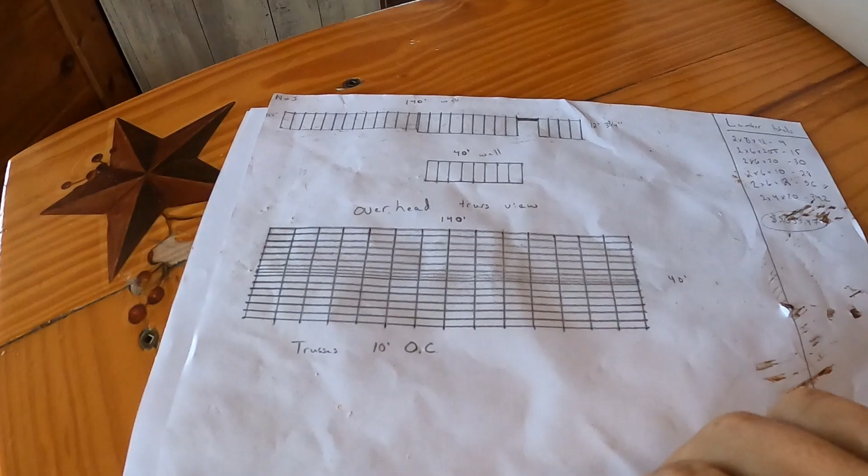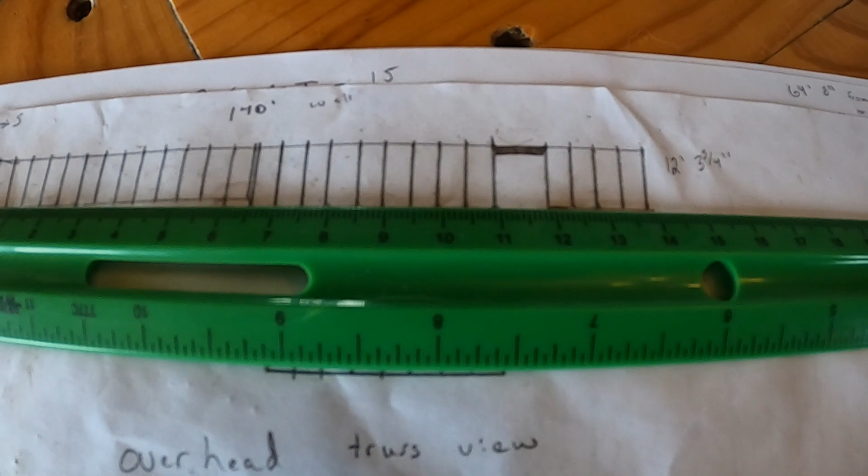And how I did it was, graph paper would be much easier, but I didn't have any graph paper. So I took this ruler, I used the centimeter side, and that centimeter side, basically every millimeter equals 1 foot. So it comes out right here all the way to 140 feet. Let me get something to point with. Okay.

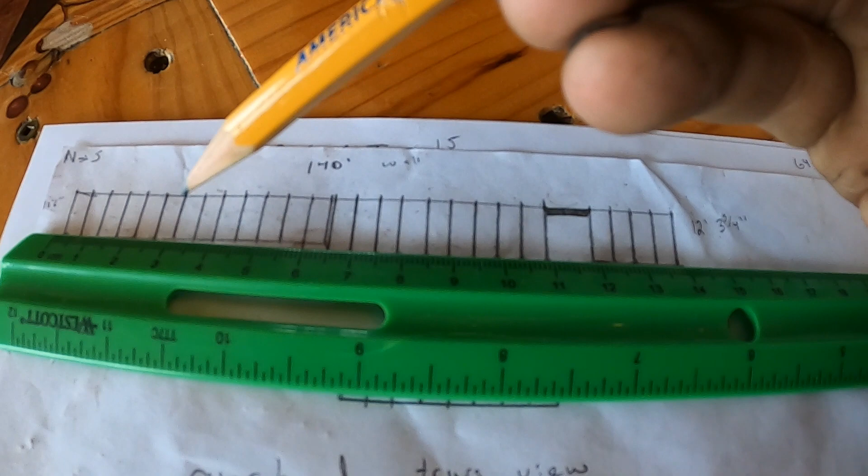So this right here is the opening for the door on the side of the barn. There's one on the exact same, on the opposite side in the exact same place. So everything is symmetrical. So what I do on one side of the barn, I'm going to do the exact same thing on the other side. So I only need to draw out one wall, and basically the east or west wall makes no difference, it's the exact same.

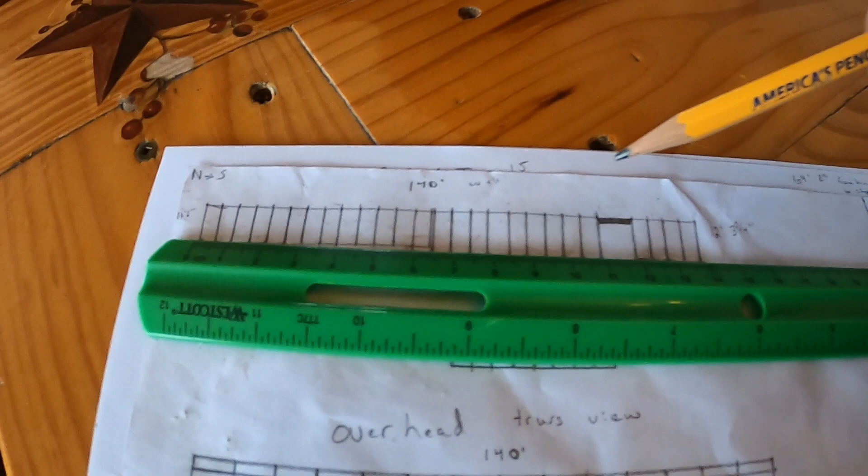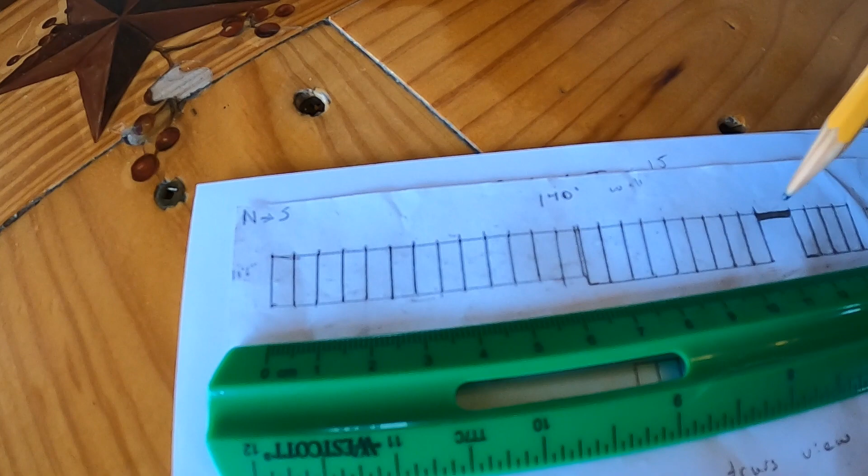You can see that I've spaced out, these are all made of, the walls are all going to be made of 2x6s, and they're going to be spaced out 5 foot on center. The bottom 2x6 right here will still be a 2x6, but it'll be treated. And there'll be 2x6x20s all the way down, obviously alternating the joints with the top. The top is also going to be 2x6x20s, but they're not going to be treated.

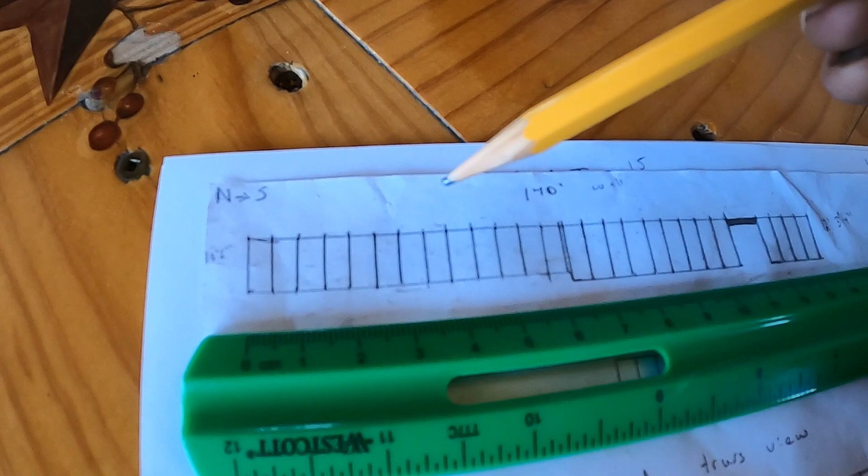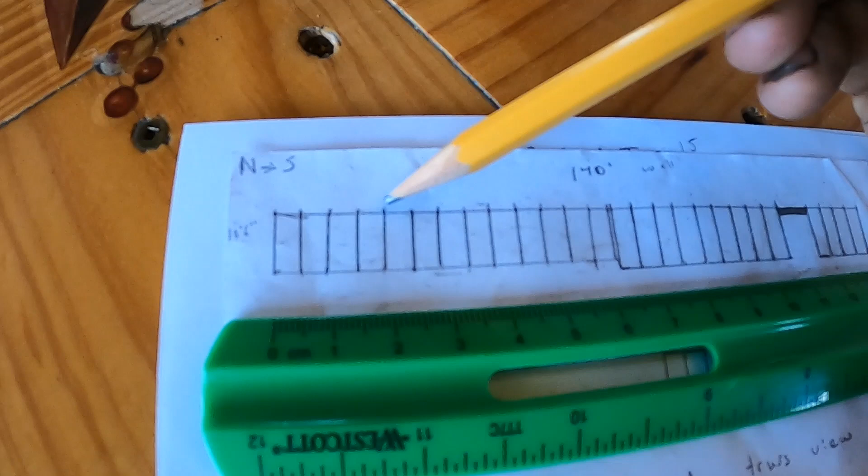What'll happen is I'll cut the top ones, and the first one I'll cut in half, so we'll do a 10 foot, and then from there on it'll be 20 foot 2x6s, and then I'll take the other 10 foot and put on this end. This offsets my seams at the bottom. So basically if I laid out a 20 foot 2x4 or 2x6, if it ends, so 5, 10, 15, 20, if it ended right here, if I had my other one end right here, I'd have two seams right next to each other. I don't want that. That takes away from structural integrity.

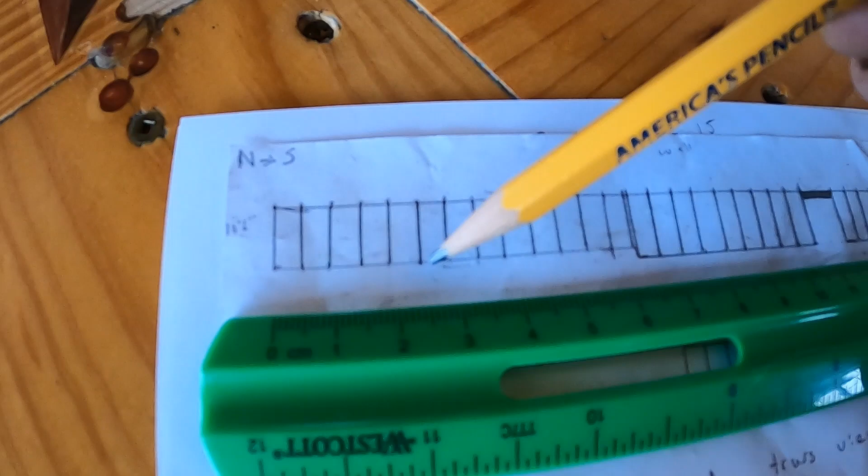Even though on the top it's going to have a double top plate. So basically it'll have a 2x6x20, and then I'll have another 2x6x20 on top of it. That 2x6x20 on top, no matter what, I don't want my seam from down here to match either one of the seams on the top plates. So I want them to be offset somehow.

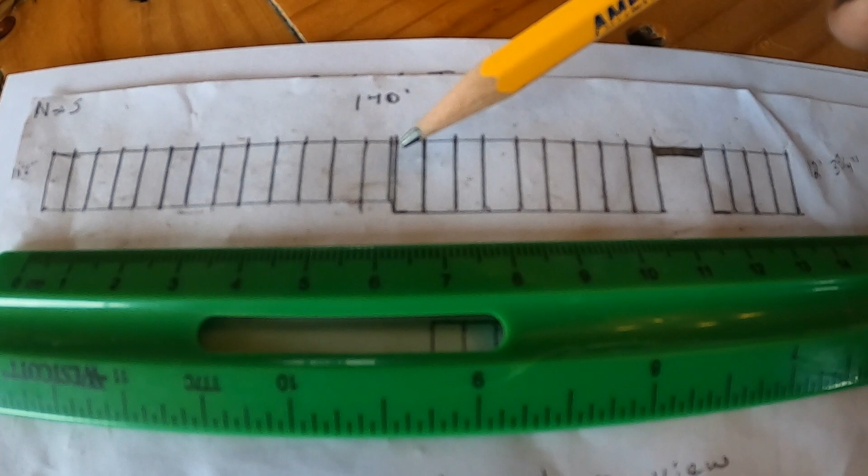Once we get down here, this is where the step in our wall is. So there'll be a 2x6x10 right here, and there'll be a 2x6x12 right here. They're going to end up being screwed together, and that'll connect these two walls. And then down here is the header. The header on the door is going to be made of 2x8s, and they'll be sandwiched together.

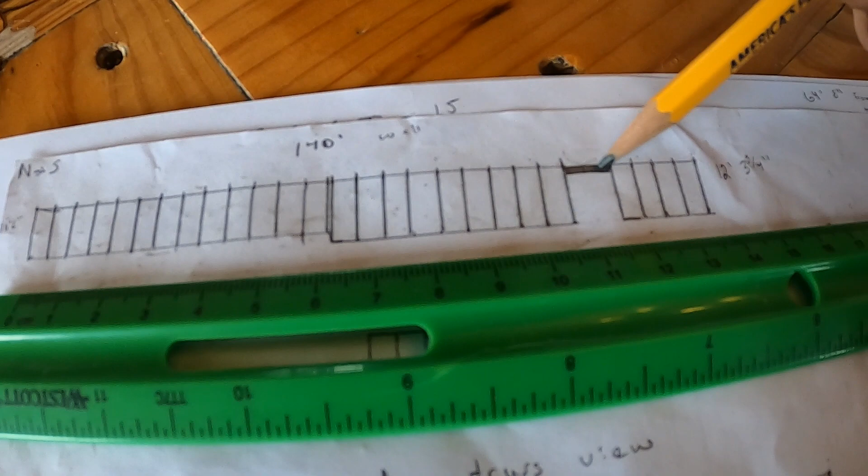So I'll have 3 of them basically. So 2 of them will be sandwiched together, and then I'll have another one behind it that's laminated on top of it, or behind it. You'll see on the build. On the corners, I will show you, it's going to be easier to show you than to explain on paper how they're connected. This is our 40-foot wall at the end.

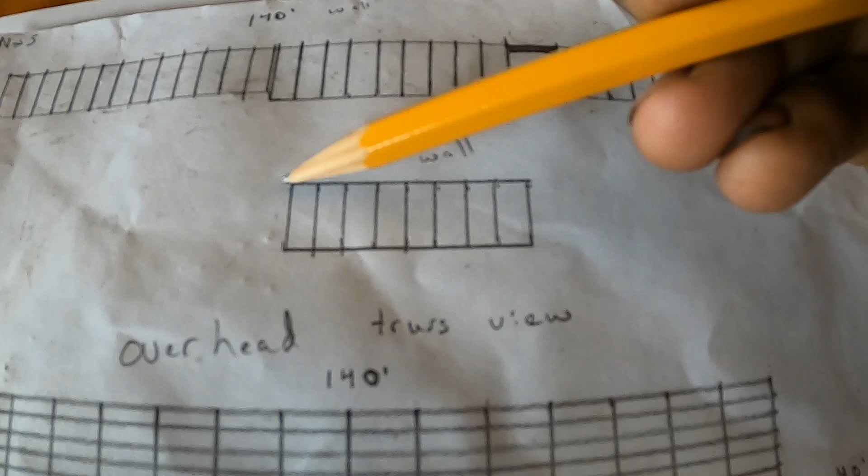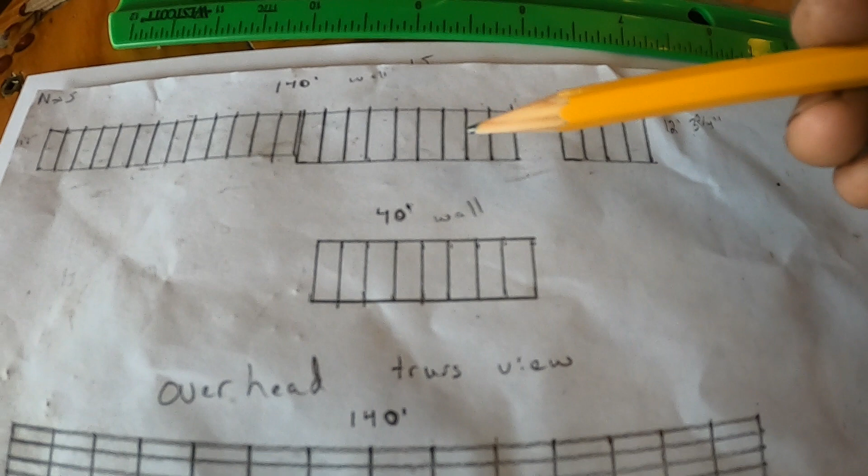Now it'll go straight across because the truss will actually come up like this, so that's where the peak will be. But this is the exact same 2x6. These will be 2x6x12s because they have to match this end of the wall so that they're all the same height. Remember, the step down on top of the concrete is all the same height. It's level, and we want it to be like that so we can keep the top of the barn level.

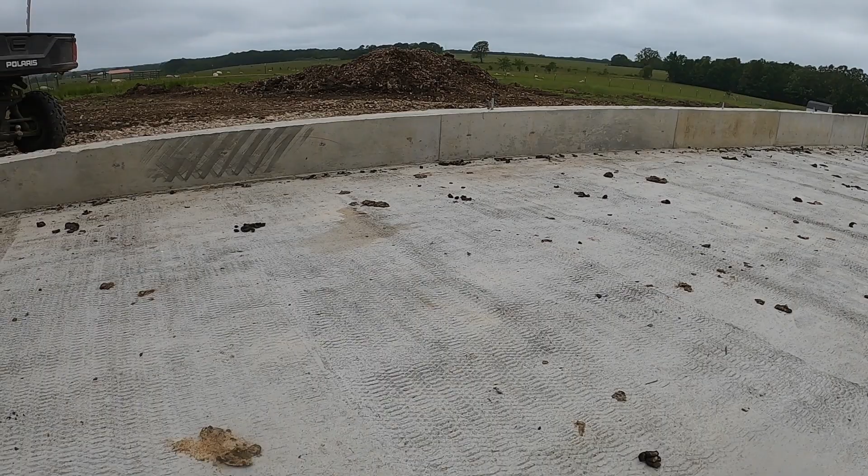These are the walls we're talking about. These are known as stem walls or curbs. If you look at it, right up here, it starts 6 inches and keeps the same height all the way down. Even though the wall itself is getting taller, it keeps the top of it level.

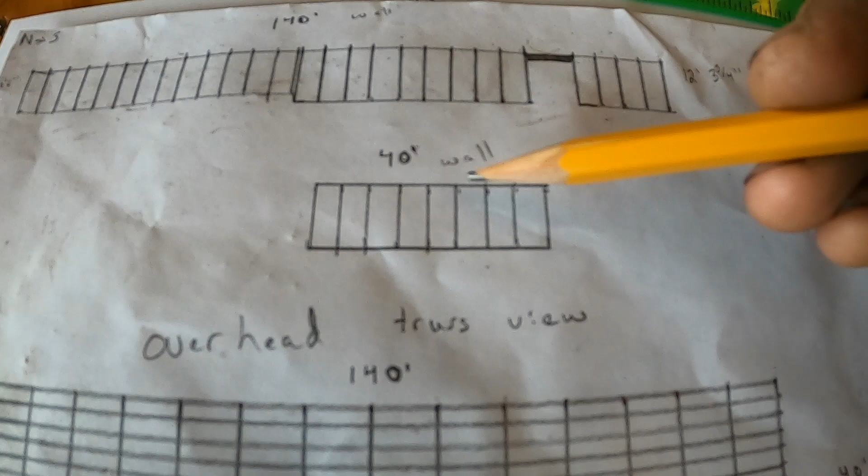This is 2x6x12s, and there'll be 5 foot on center. Same concept on the bottom, 2x6x20 treated, 2x6x20 not treated on top, and alternated seams so that they're not lined up on each other for structural integrity. And then I'll explain the corners, how they're going to tie to the other one.

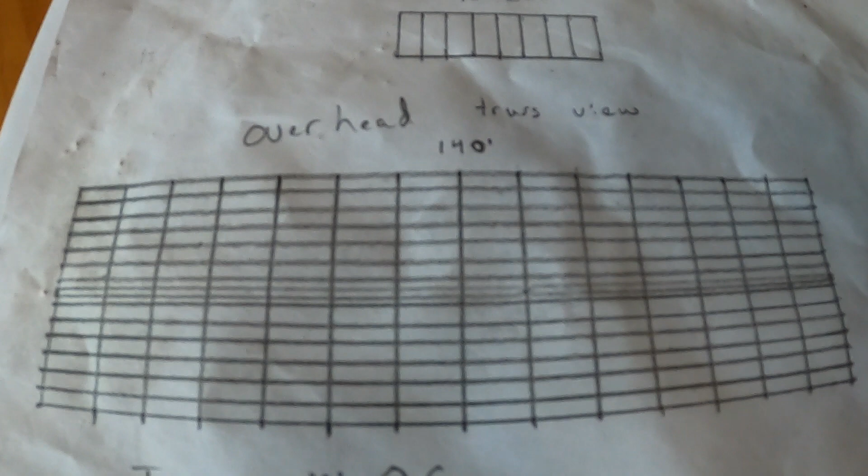Now, this, believe it or not, is not as silly as it looks. So I'll show you right here. Again, on all of my drawings right here, every millimeter equals 1 foot. Let me try to line this up. It's close. You kind of get the point, I guess, from it.

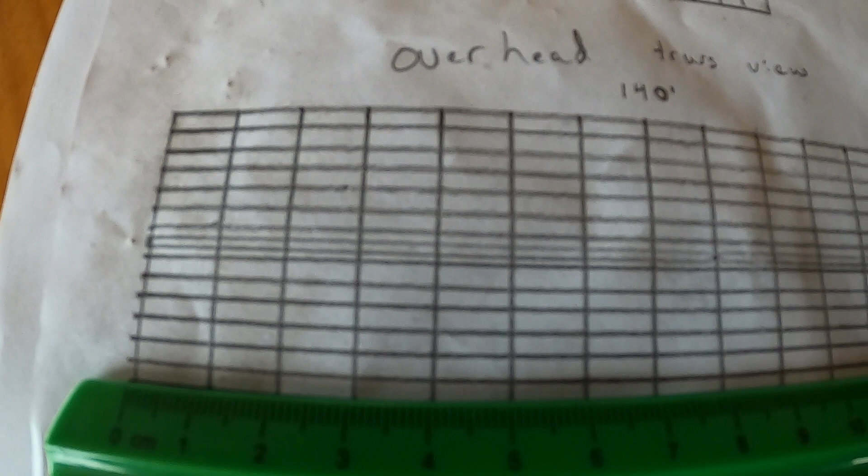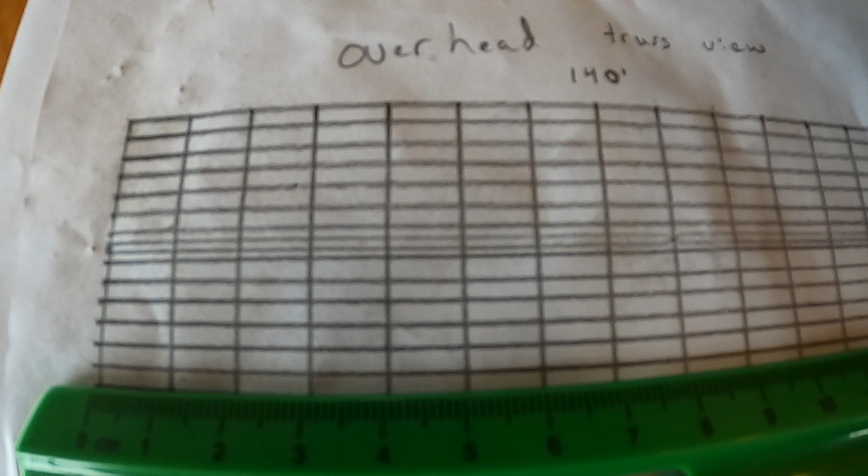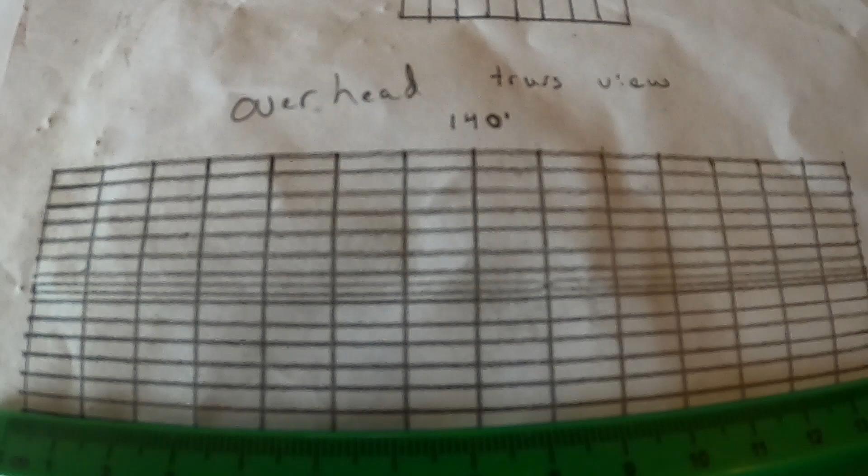So right here, the lines going vertical are actually the trusses. This is an overhead view, as if I was looking straight down at the barn from God's perspective, looking straight down at it. This is the trusses from overhead, and the lines running horizontal are all of my purlins. The purlins are for the metal to be attached to, the metal roofing, and then we also have plastic skylight panels, the clear plastic to let light in too. It'll make it better for the animals, and then we don't have to run lights all day in the winter time when they're in there.

Now these are 10 foot on center. All the trusses are. What's not quite visible as easily here is down the center. This is the exact center of the trusses, and there's a ridge cap that'll run down there. So I've got my 2x4x20s that I'm using for purlins, and they run this way.

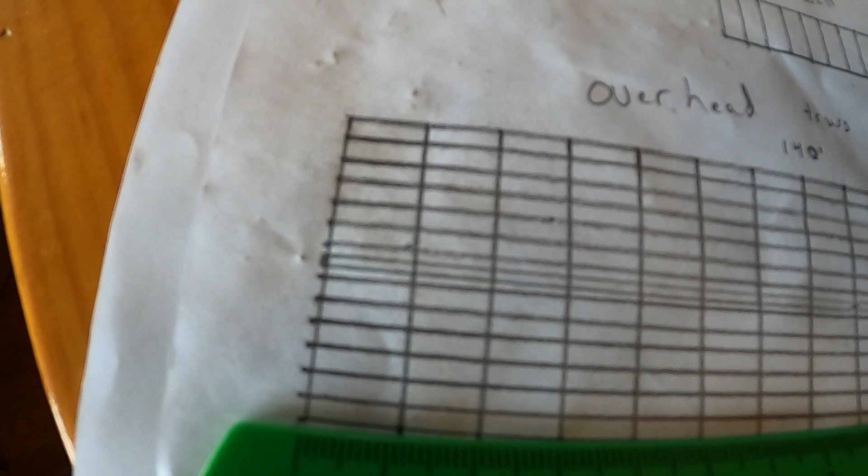Now, same thing, right? Basically I'll start out, so I'll have a seam here, and then I'll have a seam here, and then I'll have a seam here, right? Basically what I'm trying to say is, you'll see it on the build, we'll record it and show you, but basically I don't want any of my seams to line up, or I want as few of them as possible to line up.

Now, several of them are going to have to line up because there's not enough tie downs, not enough points where I'm going to be able to alternate them to where I'd never have a seam line up on one truss. There's going to be multiple on them, but there's also multiple going across, so there's still going to be lots of strength there.

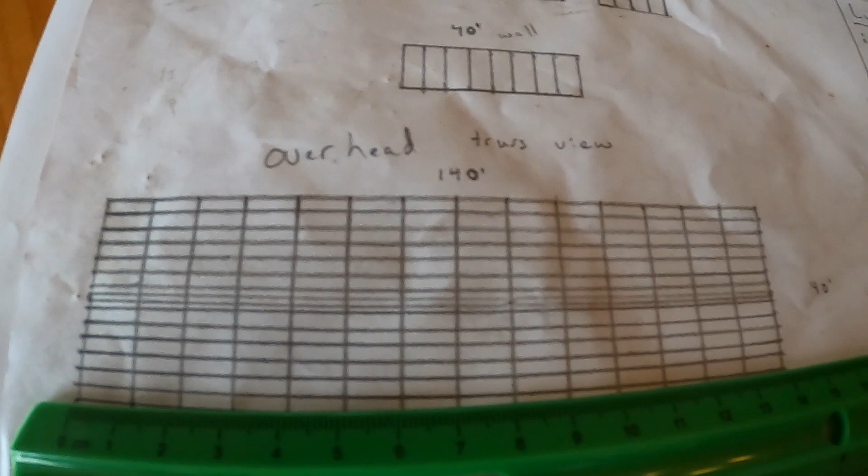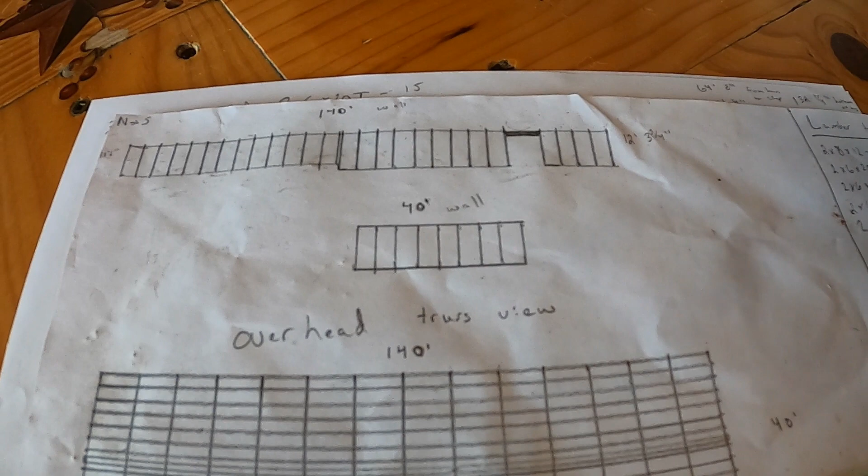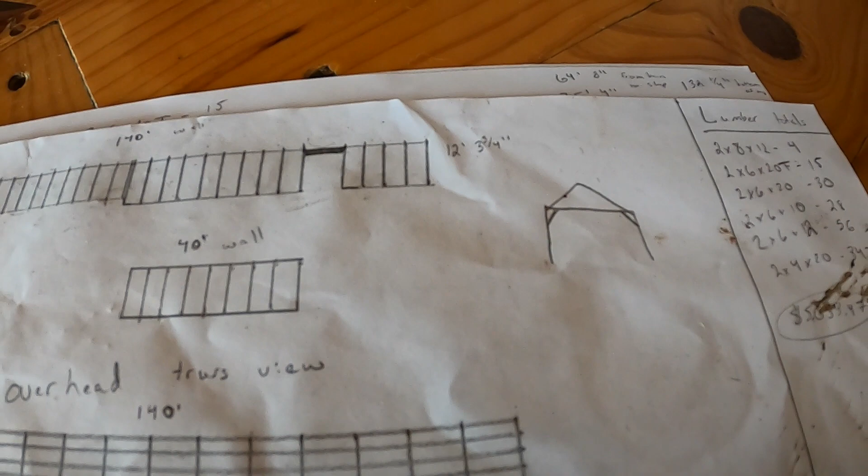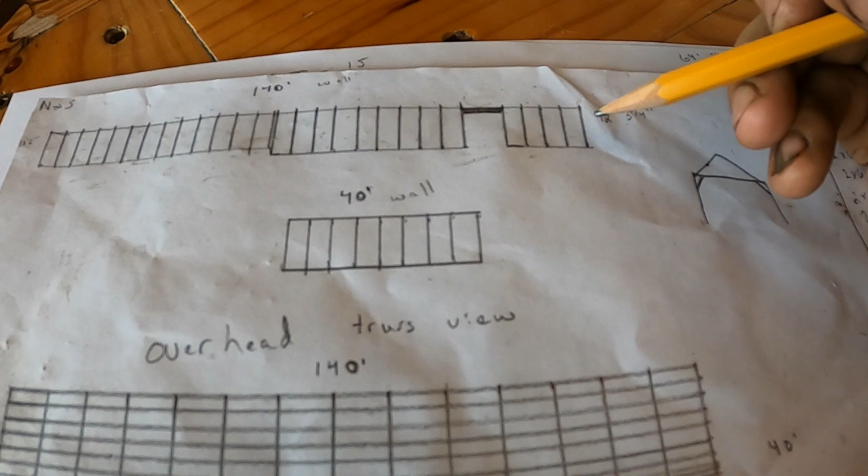The end of this barn, including the concrete, so you've got 4 foot below it for concrete, and then 7 foot above it to the peak of the roof. So overall you're going to have, that's 19 feet just in lumber, so it's 23 feet tall. It's going to be very tall, and it's going to catch a lot of wind, so we want to make sure it's as strong as possible.

And yeah, that's pretty much it for the plans. I'll show you the concrete real quick before we start building and explain the step process, and that'll be it for that part, and then you'll start seeing the videos of us putting it together.

She's mowing all by herself.

So I got Chrissy started. She's mowing - this is her first time mowing with the tractor. She had a zero turn before this. She really liked the zero turn, but the tractor is far more convenient, especially during the winter time, unrolling bales and stuff like that.

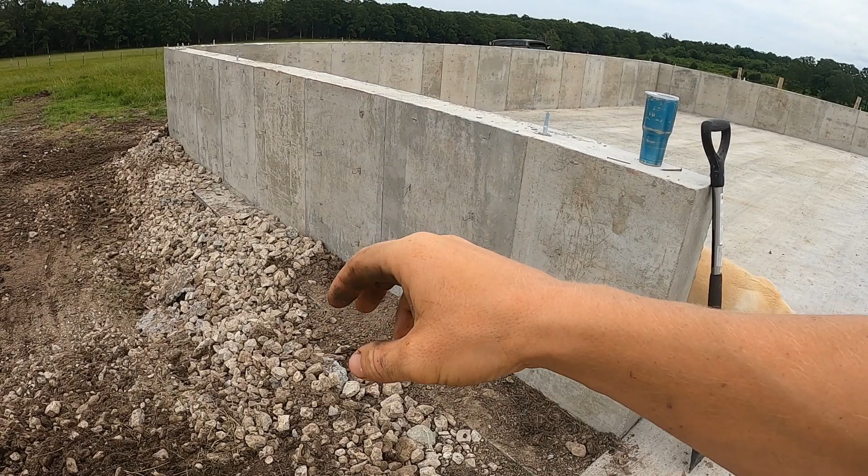But before I got her started, I used the scoop, or the bucket on the tractor, and scooped all this dirt up here. This part was real quick, basically scooped from that pile, dumped by the foundation, scooped it up there, covered it up. I want to cover the slab, so you can see where at the bottom of this wall, there's the slab that comes out. It's about 6-ish inches thick, a little thicker than that in some spots, but I want that to be covered from the exterior.

So we're using the gravel to do that. Gravel will go around from basically from this slab, or apron rather, all the way around to that apron, and then all the way up that side, because that side is all graveled anyhow, because we're gonna put our hay over there, so I don't want any mud over there.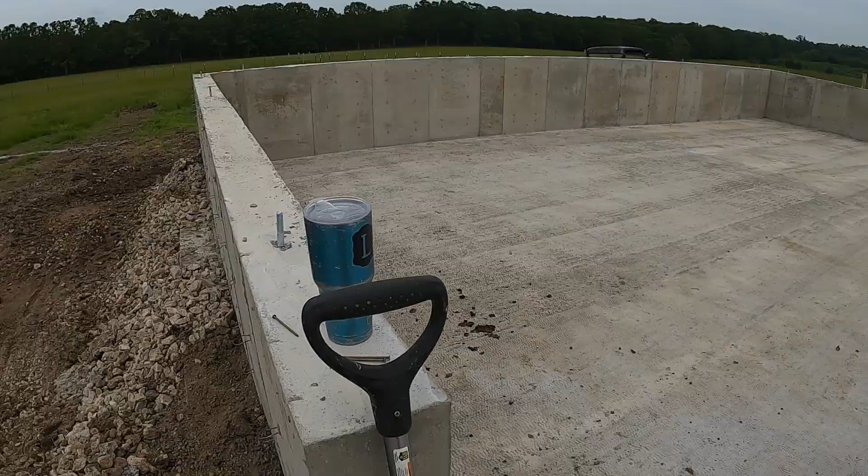This spot we put extra gravel in because I want to be able to drive off. So like that side's mud, but I want to be able to drive off in any direction. Cut it out - I want to be able to drive off it in any direction and be able, you know, be a smooth transition basically.

Did the same thing over here. Show you that real quick. So same thing, dump some extra gravel. I'm gonna smooth it down with the rake and the shovel.

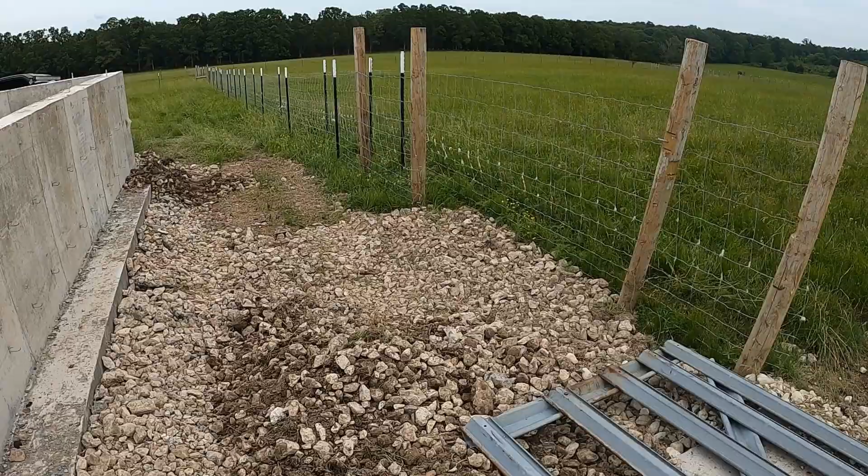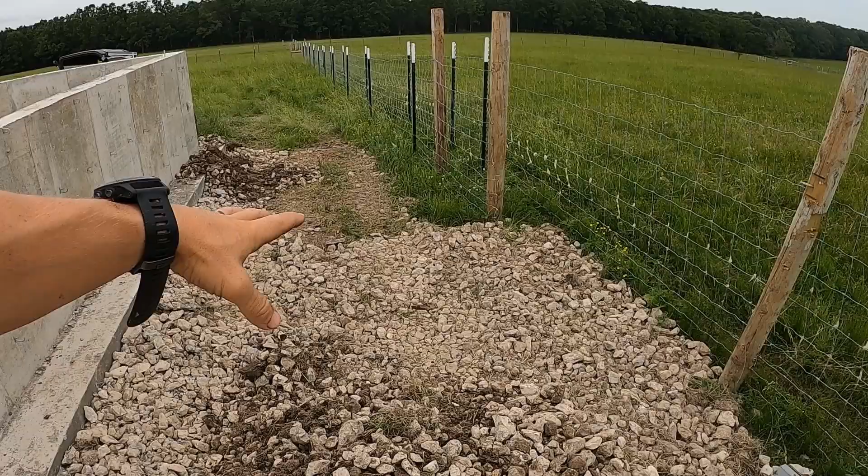And then this is all graveled right here because this is where we'll set our head chute. So I wanted it to be a good foundation for that, so it's not a big mud pit. Same thing right here where we're going to be walking when we're doing any work with the animals - we don't have to stand in the mud.

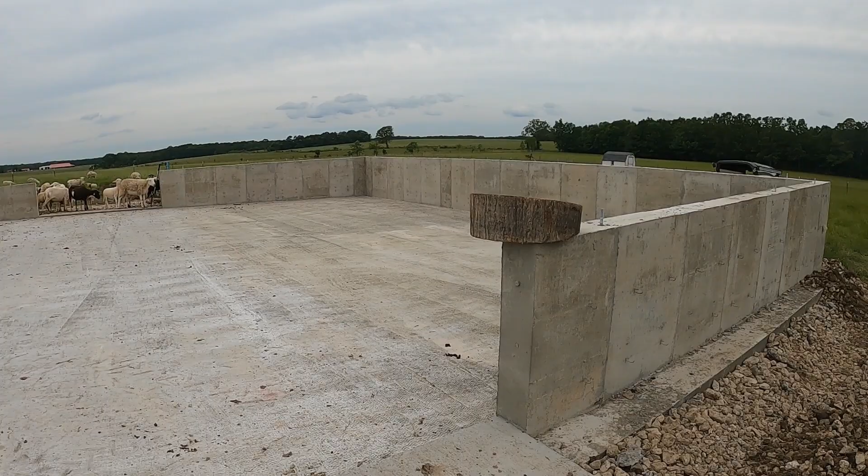And then basically this gate will actually be up, and whenever we're doing our work with the head chute, if we're keeping them, we'll push them out to this paddock. If we're going to take them to the sale barn, we'll push them straight in here to the barn. And then if for whatever reason there's somewhere else that they need to be separated to, we can push them back this way too. So we could do 3 groups basically - lambing paddock, back into the barnyard, or into the barn, because there'll be a gate on both sides where you can keep animals in or out.

All right, time lapse.

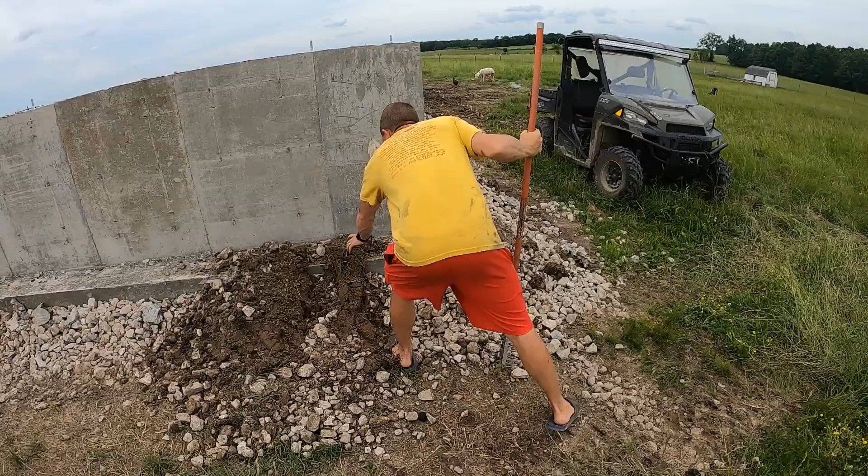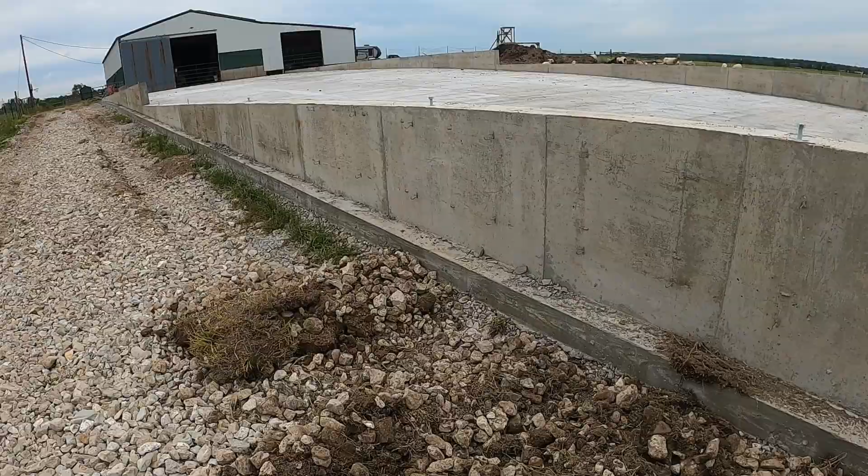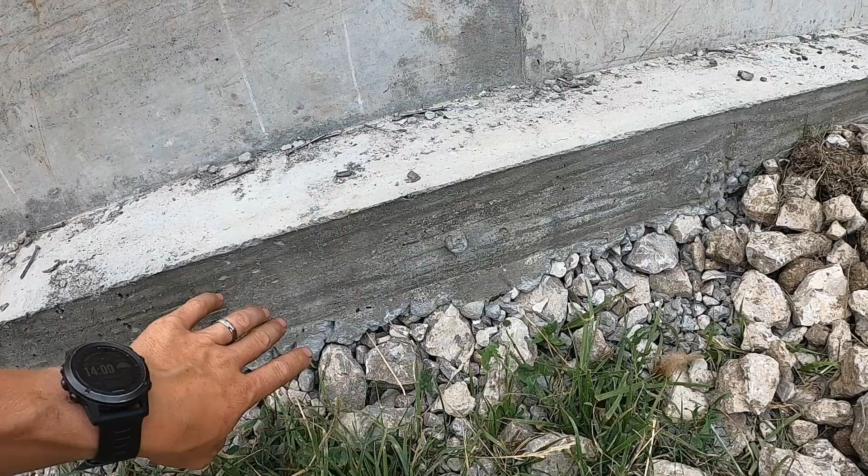Just realized I didn't show you exactly what I was talking about with the slab. So you can see right here, this is the very bottom of the slab right there. We want to protect this as much as we can from elements like water and stuff getting their way down there and getting under the pad, because if water gets under there and then freezes over the winter, it'll push up on it.

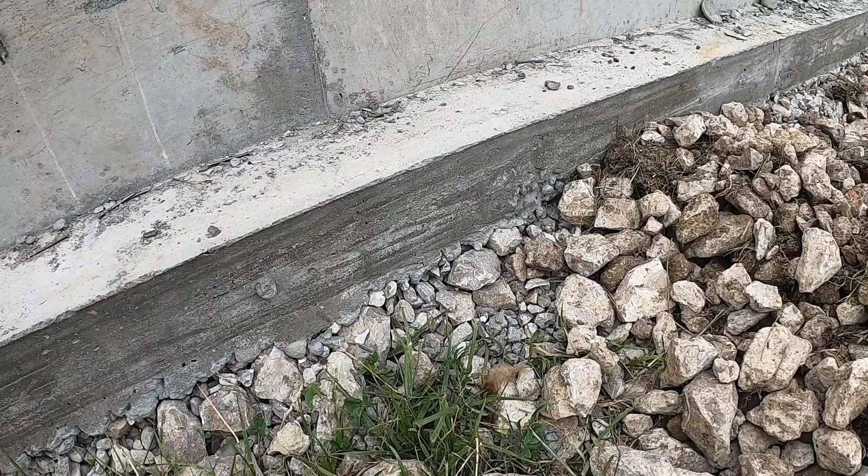Now, you might say, hey Travis, that's a lot of weight for the water to push. Well, the thing is, water doesn't compress. So no matter how much pressure you put on top of water, it will never get smaller than what the water molecule is. Therefore, basically the water will not give - the foundation would give before that water.

Well, anyways, by covering the side like that, it makes it harder for water to get under there, and it makes it less likely for water to be under there. Same thing on that side, especially on these sides right here, because this is going downhill, so water could actually start coming down here, and then see how we have a rut there? It could push under. We don't want that to happen. So that's why we're doing this.

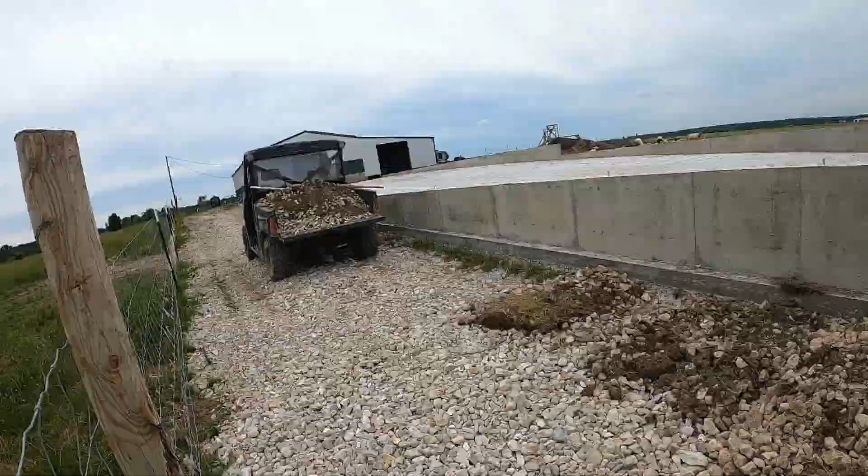All right, we got about half of this side done. I need the tractor, but Chrissy's still mowing. As you can see in the background, hopefully you can see it - all those dark clouds, that's hurricane, or tropical storm now, I guess.

Cristobal. We're trying to get all this stuff done before that rain hits, because originally they were saying we're gonna get like 5 inches of rain. Now they're saying somewhere around 2 inches. Honestly, who knows? We just wanna have it to where if we do get 5 inches, it's not gonna cause any damage to what we've already got going.

The other thing is that all my building materials should be showing up tomorrow. What's tomorrow? Yeah, tomorrow - or no, my bad, the day after that. So it should be showing up Wednesday. Today's Monday. So we'll get all that done, get as much as we can prepped.

And Chris is gonna finish mowing. I'll scoop a couple more scoops in the back of the side-by-side here and finish up this side. The reason I'm not using the tractor is two reasons: one, Chris has got to mow before the storm gets here; two, the tractor won't fit down this alleyway and be able to go sideways to scoop everything in. So on that side it worked very well, but this side not so much.

So yeah, I'm gonna go weed eat real quick while I'm waiting for her to finish mowing.

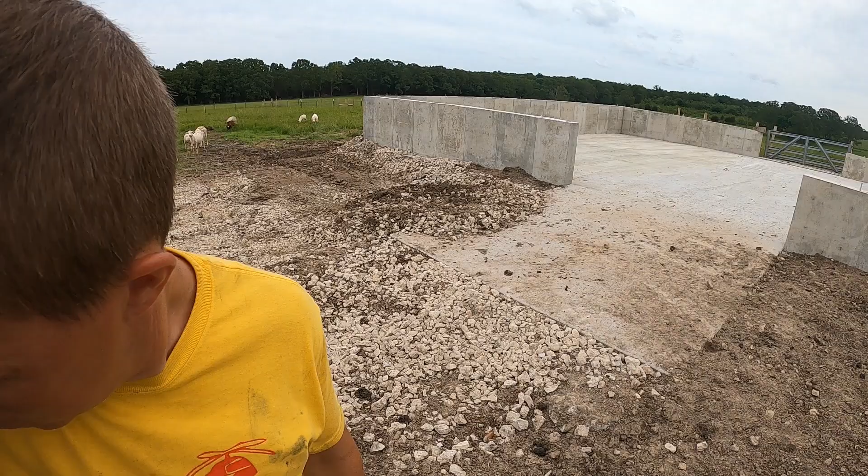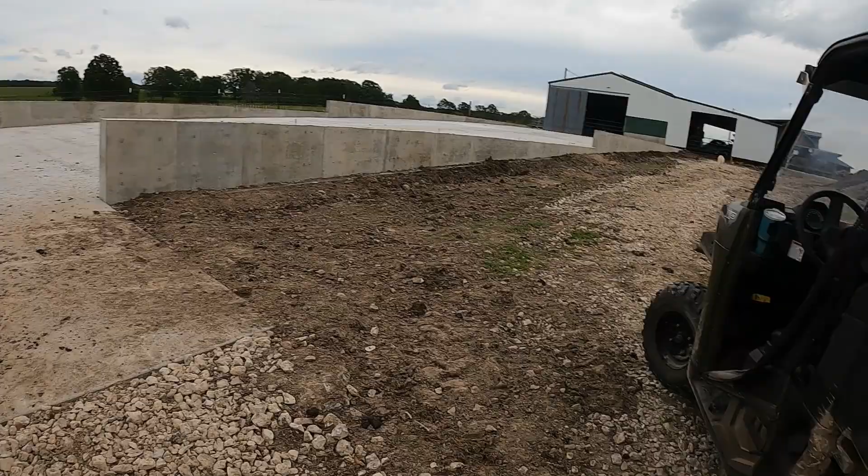All right, so now you're probably wondering why I have all this gravel stacked up a little bit higher than the concrete. Well, it's just simply because it's gonna get packed down. It's only 1 inch or so, maybe 2 inches higher. This was originally about 3 or 4 inches higher, but this was actually all dirt. I'm sure you've probably heard people reference a sheep's foot or an elephant's foot, same concept. For the weight of their body, they have a very tiny footprint. So like I guess a sheep's footprint is probably about like that, maybe a little bit bigger. But anyways, for the amount of their body weight, it packs down very well. So, all right, I'm gonna go weed eat now, for real.

Well, look at that. Chrissy mowed the yard with the tractor for the first time. She used to have a zero-turn like we talked about. She didn't hit nothing, or at least nothing's on fire from it.

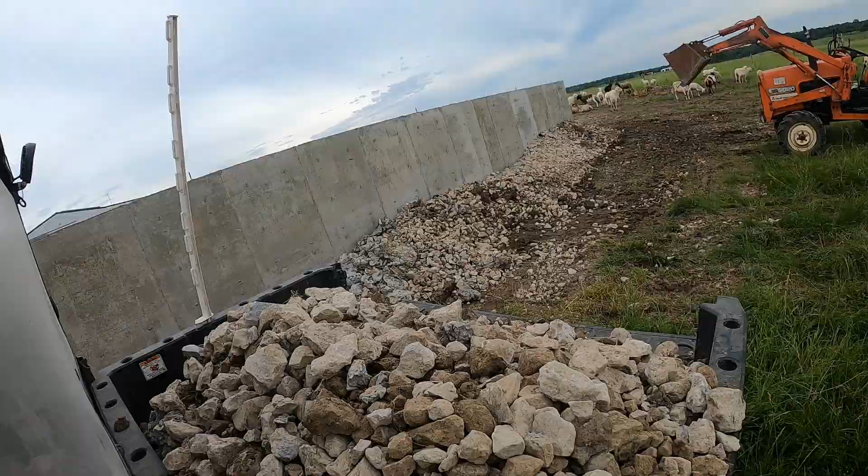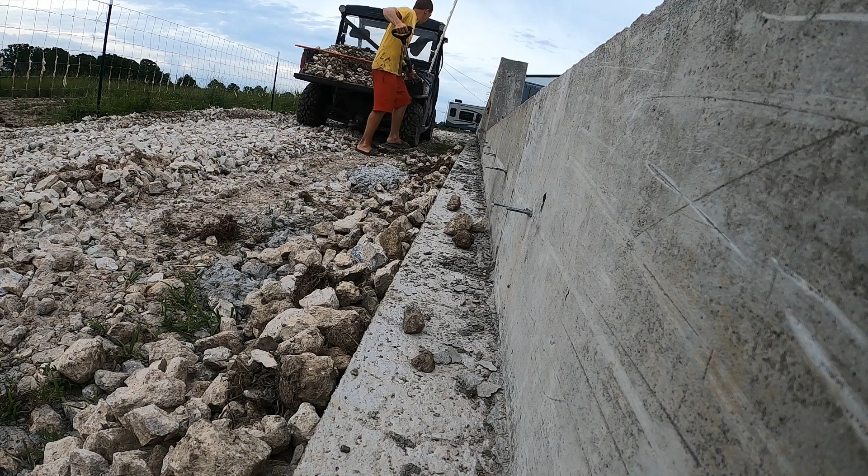All right, we're real close to finishing. I'll have to get some more rock. I'm not gonna beat the storm coming in, unfortunately. It's gonna be here and dinner's ready, so by the time we get done eating dinner, it'll be here. But since this is all graveled right here, even if it rains 5 inches, this will all still be drivable. I'll be able to come back and finish this. So minor delay, but it'll be all right.

Materials will be here on Wednesday. Well, the wall materials will be here on Wednesday. Trusses will be here Thursday. So we're well on our way.

You pump the water out using... what did we just make? Pipe. Okay, but the pipe is essentially a sprinkler. What's it connected to? Sump pump. Let's go see if it works. This is the sump pump, obviously, it's submergible. And this is a pipe that me and Gage made to put on there. I'll show you the end in a second, but you could probably see, maybe not. We cut a slit in the end of it to make it like a sprinkler, just for fun.